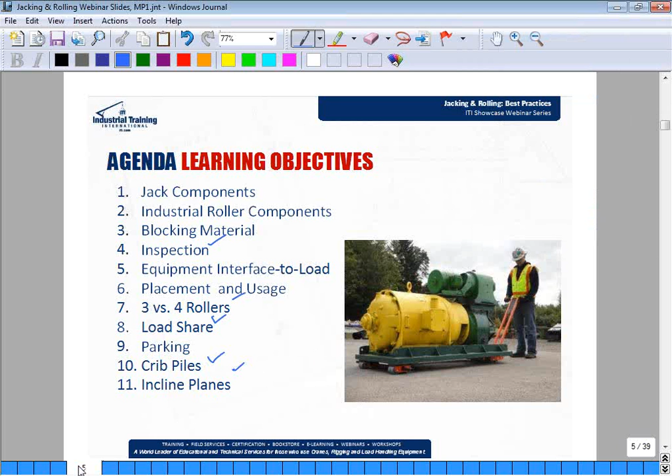What we're not going to talk about today are any airbags that can lift devices. They usually take an external air source and are kind of unwieldy at times, just like this pen is. And so we'll get going on to the next slide and discuss some of the components.

Some of the pieces that I want to highlight here are really the load points. This is where we're going to attach the jack to the load. Here we have a single acting hydraulic jack, a ratchet jack, and a self-contained hydraulic jack. Starting on the left, the single acting hydraulic jack is usually connected to a hydraulic source of some sort, and then jacked either by lever or by machine. The load point here is really the only point to attach the load to. This is typically used in a vertical position, and usually lifts the load vertically.

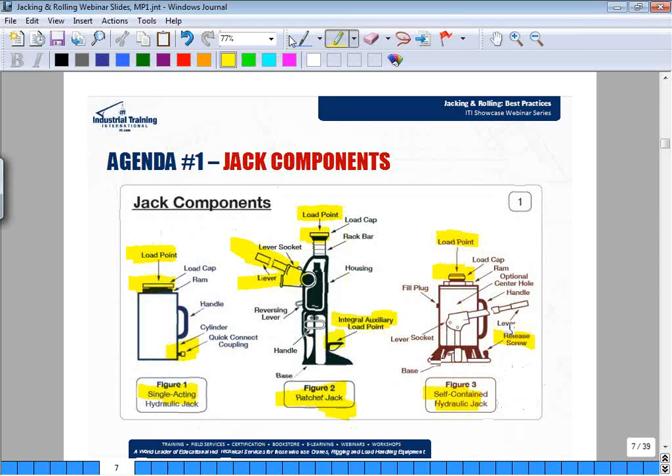Moving into jack components, the connecting piece between the jack itself and the lever arm or the handle is really the most important piece. We show this image here to describe the relationship between the size of jack that we're listing, as well as the length of bar that the manufacturer recommends for use. A lot of times the jacks will come with a specific bar to use.

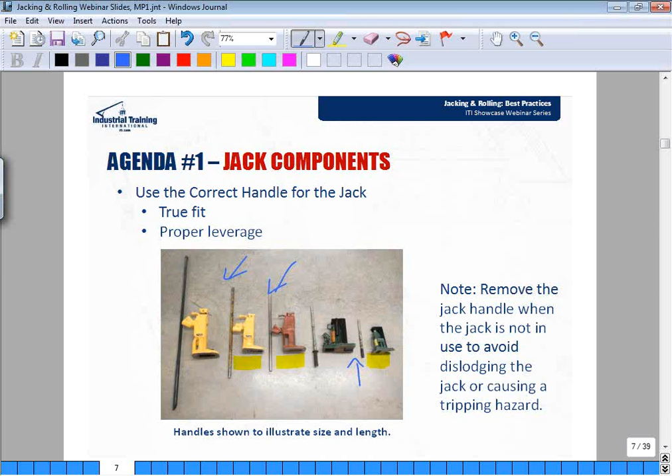Notice here that we have two very similar sized jacks. They're actually both 5-ton capacity, but in one case the manufacturer has decided to use a bar that's slightly shorter than the one next to it. And this is really important when it comes to making the mechanical advantage work for you and selecting the right jack for the right job.

Also, it helps to prevent overload of the bar, so that we have a limit to the bar length that we can use. So one of those was 30-inch and the other one was 36-inch. They're both 5-ton jacks, but based on the mechanical advantage and the ratchet and pull system and track system, different manufacturers have prescribed different handle lengths.

That information can be found most of the time stamped on the jack itself. So for instance, it might be kind of hard to see, but here we have a 30-inch jack handle callout, and that's stamped right on the jack itself. Whereas other companies will write the jack handle length on the manufacturer's label there. So a couple of different examples, and really getting that jack handle length correct is important. It may not even be the handle that the jack originally came with, but if it can withstand the load and it's the right length, then you should be okay.

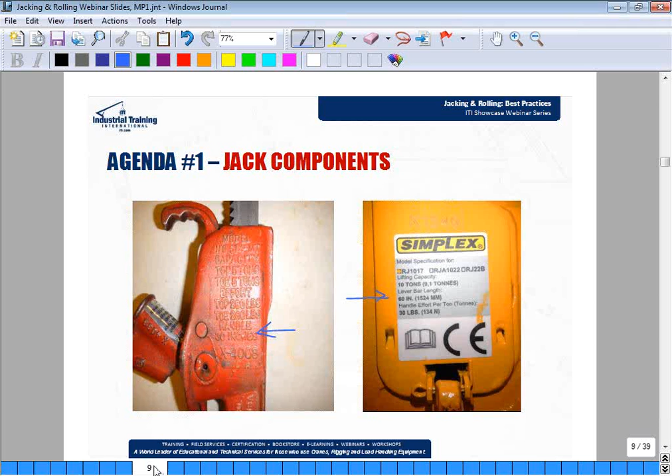So let's talk about moving into the industrial rollers portion. We want to introduce these as two different types, and the first type here is the industrial roller system. It kind of looks like a tank with a turret, and the exploded version here has a swivel top and steel rollers underneath with connecting links. This is all captured inside a housing, and these roll around in many different directions. They can be locked to prevent swiveling underneath the load, and can also freewheel.

The way we size these is they're typically sold in sets of 4, and so the set of 4 here is typically listed, get my pen working, typically listed at an overall capacity for the set. So for instance, 4 at 40 tons, where each is at 10 tons in this example, or a quarter of the entire set capacity.

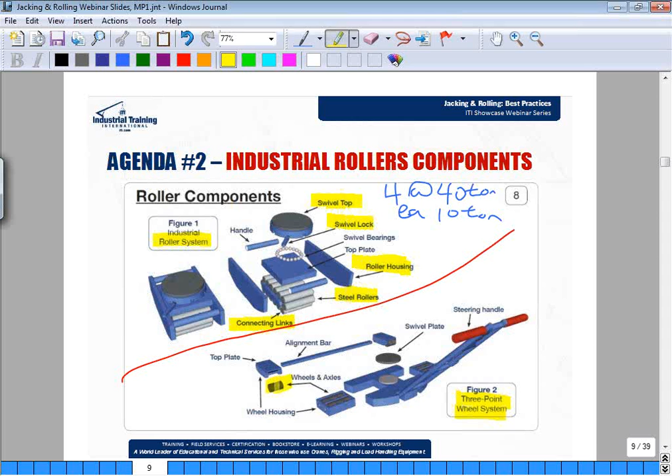The other type of rolling system we have here is a 3-point wheel system, and there's a lot of manufacturers that make these. They typically come in synthetic rollers, or they come in a steel roller design.

We've got two separate little pups here. These are called pups, and they typically hold the load in a triangular fashion, which I'll show a little bit later. The alignment bar that is set up between them slides into a slot underneath the pups themselves, and then there's a steering handle that has its own set of pups and a swivel head.

Typically, the swivel head doesn't lock; it has to rotate freely, and the entire system is rotated and maneuvered by a person. These are typically sold in sets of 3, and the interesting case here is that the steering handle set, say if we had a 25-ton set, the steering handle would accommodate 50% of that capacity, or in this case, 12.5 tons. The other two, the two pups, take up 25% of the overall capacity, or 6.25 tons each in this example.

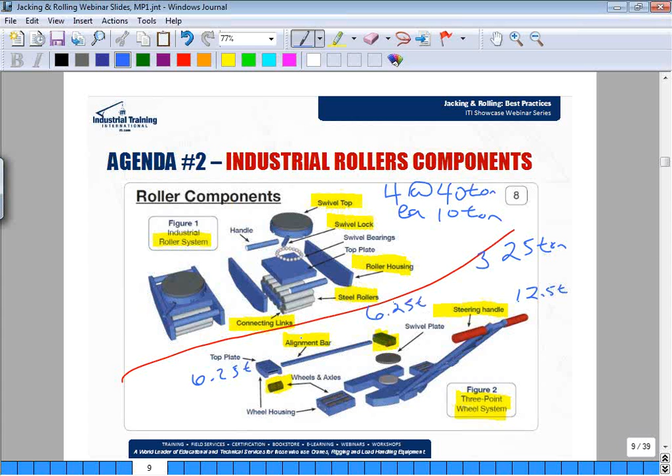Down below there, the steel rollers; they also certainly make synthetic rollers, UHMW or high density synthetic material, to help for non-marring. Sometimes the wheels are larger depending on the frame of the roller system. So check with the manufacturer. Hilman's are manufactured in the northeast of the U.S., and Heavy Haul is another manufacturer. There's a number of really good providers. These folks have been around for decades and have really gone to school on a host of different roller types, so it's worth taking a look at their websites to investigate what type rollers they have.

Sometimes we'll be able to put rollers upside down and roll a beam on top of them for bridge installation and other applications. So depending on what the needs are, some have a hinge top, swivel top, and I think even on the next slide, let's go there just for a minute, there's a style that is a tilt type, so that can be used to go up and down inclines. In this particular case, this is a Heavy Haul design, and that entry and exit incline on the side plates there permit for up to 26% grade.

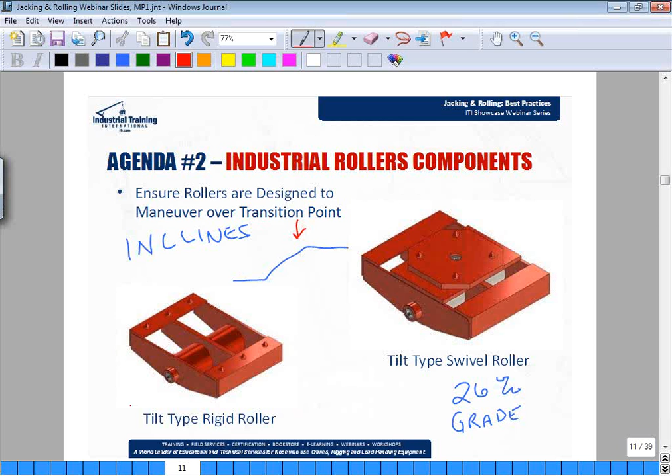So the incline can be pretty aggressive, and there's just a single set of wheels in there, and they stay parallel to the load, but as the incline changes underneath, the single axle accommodates that transition point on the break in to go up the incline and the break over at the top of the incline. So it's really choosing the right roller for the right job. One note back here at the turret style, the recommendation from the manufacturer is that these can be used on inclines as well, just so long as they're attached to the load itself, however you can accomplish that.

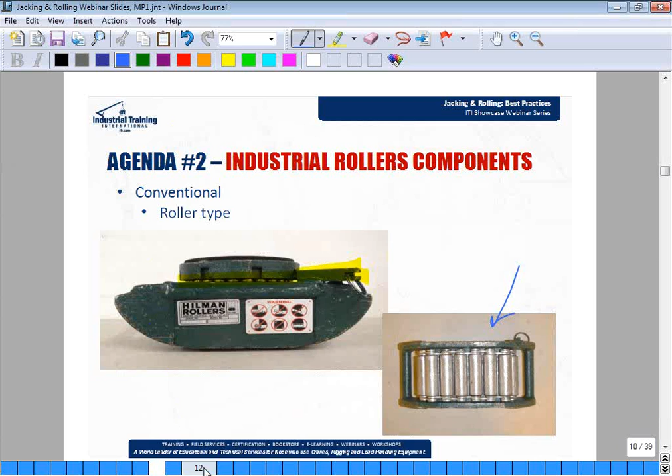Moving into the other type of roller system, this is just an example. We have two of these systems here at our facility, a 3-point rolling system. Not pictured here is the actual crossbar that would accommodate the joining of the pups, both for this large 25-ton set as well as this 10-ton set here. You have a bar that goes between them and keeps them aligned and able to traverse corners, as well as if any unloading occurs, they can stay at least parallel until you get loading back to the pup.

One note about these 3-point rolling systems is they are for flat surfaces only, not recommended for inclined surfaces, just due to that transition point tends to mar up the rollers themselves, and they're not really rated for that loading type on the bolts themselves and the axles that hold the rollers in there.

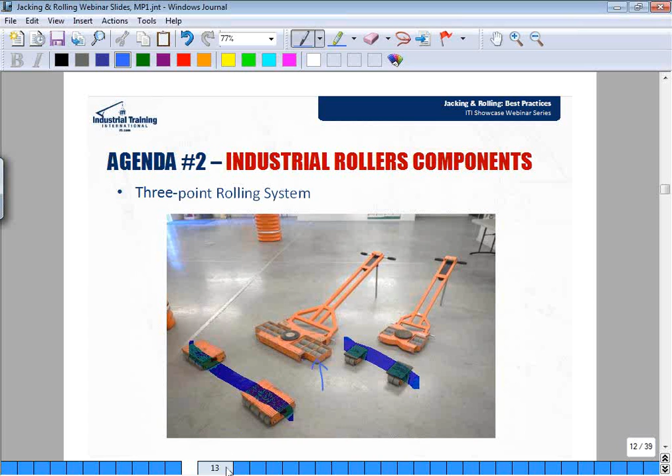So just a few notes on industrial rollers and how to use them. Typically, when we haul loads, we want our palms to be face down when we're steering the load, and we typically don't want to use the steering handle or the steering person to push or pull the load. We want to allow other people or equipment to propel the load itself. And Mike, do you have anything?

Yeah, the safety aspect for almost any handles used for rollers, the concept here is palm down. And the reason is, if you're rolling along, and for whatever reason we haven't cleaned off our rolling surface very well, and we hit some grit or gravel, and it actually freezes or stops, let's say in this case the steering unit, the momentum of the load can go forward and slide over the top of that roller, and then slam the handle down, and if our hands are palm up, it can take our hands down to the ground with the handle.

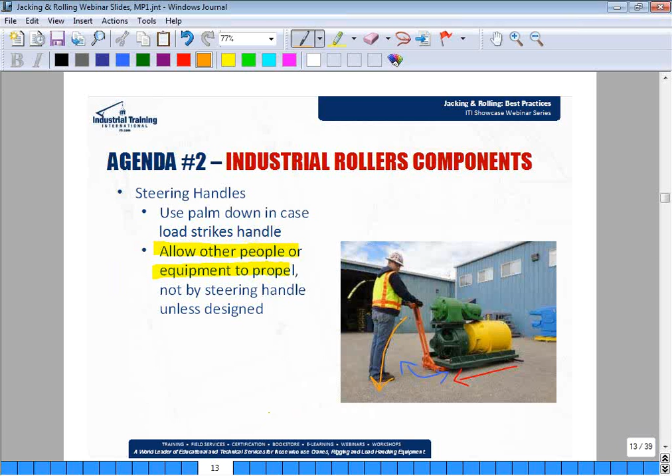So you want to make sure that we keep some body space back as we're walking. Just anticipate some issues that can occur, but in all cases, first thing is to clean the runway off, and that will help minimize the risk and lower the risk to that. Those are great safety notes.

One of the last roller component types is sort of an old school system and model. We have the pipe or the round stock, any type of round timbers or steel pipes that we use to roll along a load that has a base skid system. Notice this one has two main beams, and then it actually is ski-tipped a little bit on the ends. We have loads like this, and we use pipes at all three of our training centers in Woodland, Washington, Memphis, Tennessee, and also in Edmonton, Alberta.

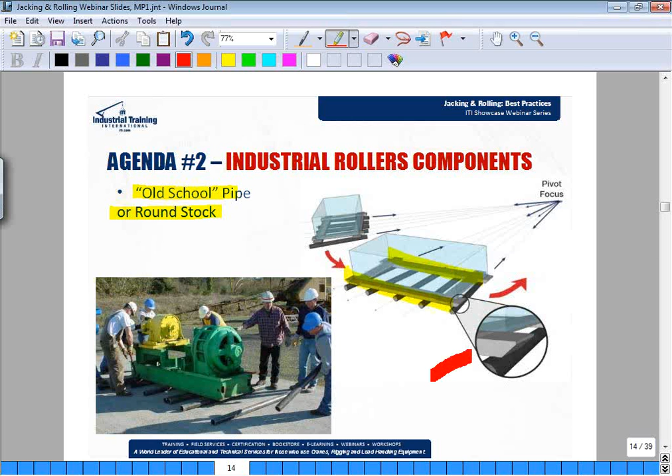And the pipes are laid down. These are 4-inch Schedule 60 pipes, and they're laid according to the travel path, so they need to be parallel when we're running straight away. And then when we need to turn, we're going to put a cone or create a visual focus point out there, and we'll turn those pipes prior to placing them underneath the load, like the spokes on a bicycle wheel. And then we push or pull that load across, and as that hits that angled pipe, the load will turn, and we can make a 90-degree, or even a large sweeping 180.

It can be done with round stock pipes, or even round wood posts, as Jonathan said, that are high capacity, or we use ash, and they're more than fence posts. They need to be a super hardwood if they're wood, such that they'll stand up to the work activity. Having some pipes around, it's an old method of moving loads, but it's still very suitable and very handy. If you don't have a set of rollers on a job site and you need to move something quickly, take a look and identify the size, diameter and wall thickness of pipe that would be most suitable for the load weight.

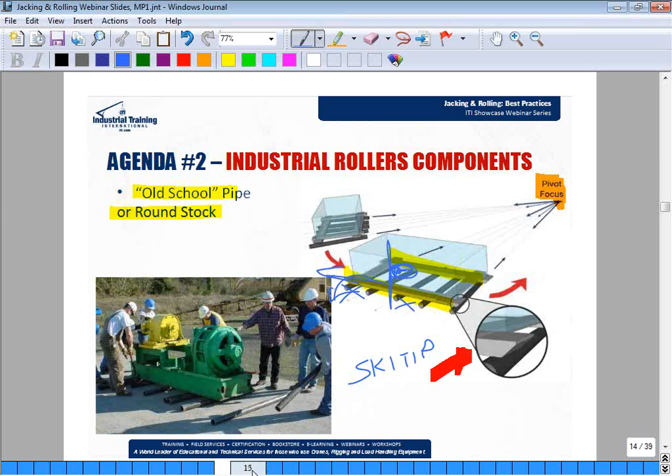When we talk about jacking, one thing that comes to mind specifically is blocking material, either using jacks on blocks or using jacks to lift a load and then to block underneath the load as you lift it. We have some different information here for the different types of blocking material you may find: Doug fir, white oak, and ekki. Ekki is a very dense wood.

To just highlight some of these parameters here, the Janka hardness test. Of all things, they actually fire a ball bearing at these different pieces of wood, and they figure out how much force it'll take to push behind that ball bearing to get it embedded half the diameter of that ball bearing. And you can see the Janka hardness for the ekki wood is much higher.

I mean, twice as much as white oak and Doug fir. So it just kind of gives you a perspective of how hard and how dense this wood actually is. Elastic modulus is the overall strength of the wood, and modulus of rupture is how the wood is loaded parallel to the grain pattern. And so if you have a choice to use, I mean, ekki is a little more spendy, but it'll last you quite a while.

And Doug fir and white oak are typically used. We've got those in our yard. And if you have any questions or want to find a little bit more information, the source down here, wood-database.com, is a useful place to go to find this information.

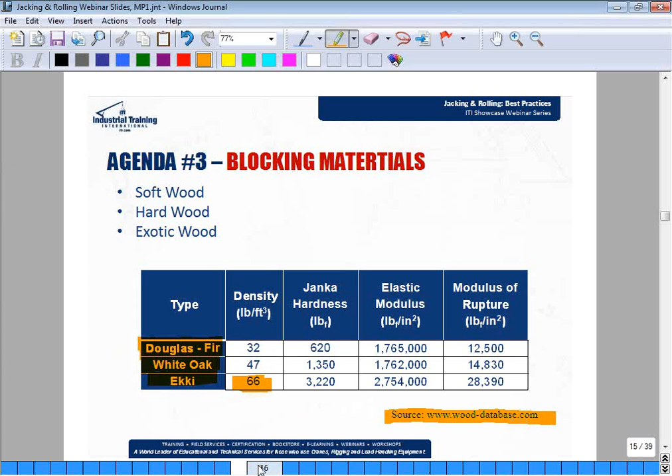Moving on next to how to inspect our gear. Just a minor note here, we're just going to talk briefly about this, is using ASME B30.1 as our go-to document for the inspection criteria and rejection criteria for these jacks and rollers. I had the privilege of serving as the chair for this committee for a number of years, and we expanded it from jacks to, it has now mechanical jacks, hydraulic jacks, airlifting bags, air casters. It has gantry systems, and it's introducing now also strand jacks as the next target subject to go in here.

And in each of those chapters, particularly to the equipment, there are discussions about testing, if necessary, design factor as applicable, then operating environmental conditions and issues, inspection, removal criteria, and operating practices. So each chapter's got a great listing provided by a consensus group within the industry.

And if you don't have this and you are using jacks and rollers to help move loads, great thing to get. I know you can get it at asme.org or the ITI bookstore, but in either case, it's good to pick up the standard, along with the manufacturer-specific recommendations or requirements or guidelines, to help manage the equipment that you have in your inventory and or the equipment that you rent.

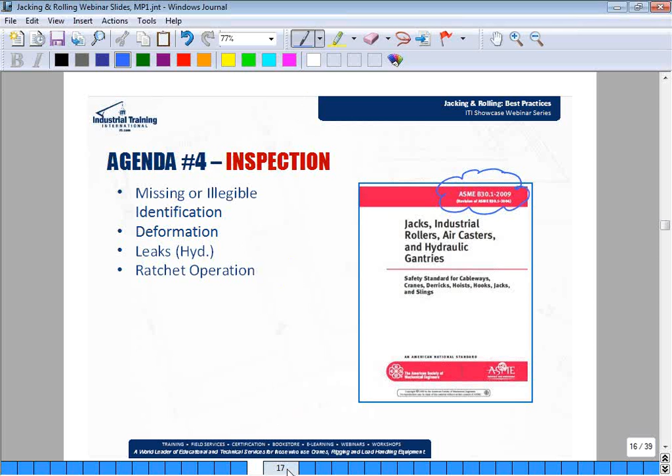Moving into our next agenda item, one thing that's actually listed in the B30.1 is this comment about using a friction surface or a friction material to place between the equipment and the load itself. And what this does is it's really helpful to use this wood or compressive material to place between the jack and the load. Specifically, these load points here where they're going to come in contact with the load itself.

What this does is the wood or compressive material actually fills the gaps and sort of equalizes the load on the load point to allow that load point to first of all stay engaged to the load, and second of all to use the entire load point for lifting.

For some of you that have been on previous webinars with us, you know that we've had a number of programs talking about coefficient of friction. The average for steel to steel is about 10%, and the average for steel to wood is about 30%. So by slipping a little piece of plywood or high-strength material in here, we create a better friction face-to-face contact point, and it helps ensure a better engagement or long-term engagement while we have the equipment in use.

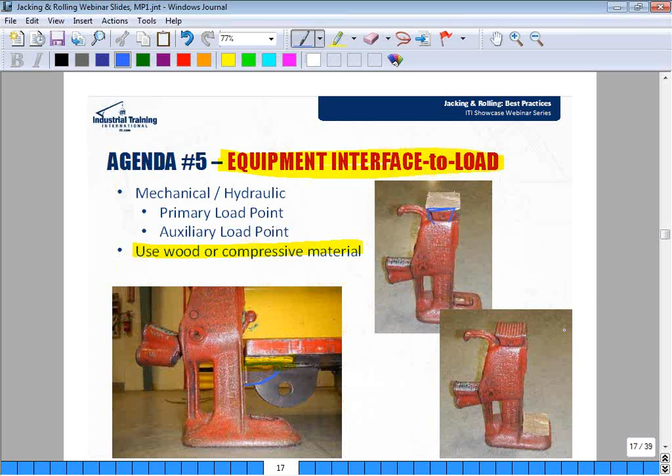And the challenge here is constantly when we're going to jack, the first thing that's going to happen is that the load to jack interface contact point will not be perfectly level. And we're generally going to be potentially putting some toe load to it or some slight side load to it, because we have to move the load, and these jacks are built to do that with the foot base length and width to permit that, and within allowables, which we'll get into in just a second. But we sure want to make sure to stick that jack and make sure the contact surface doesn't move while we're within that operating range or working range.

Moving next into placement and use of jacks. We talked before about the solid and level surface the jack needs to be on. It can be used sideways, but this indeed is one of the most important pieces: having a level surface to use the jacks.

The next piece here is stay within the rated capacity, and we'll calculate this in just a moment. But whatever we decide is our loading on the jack itself, we need to make sure that the rated capacity is greater than that load. We'll also have to be aware of cross-corner loading. We'll explain what that means a little bit later.

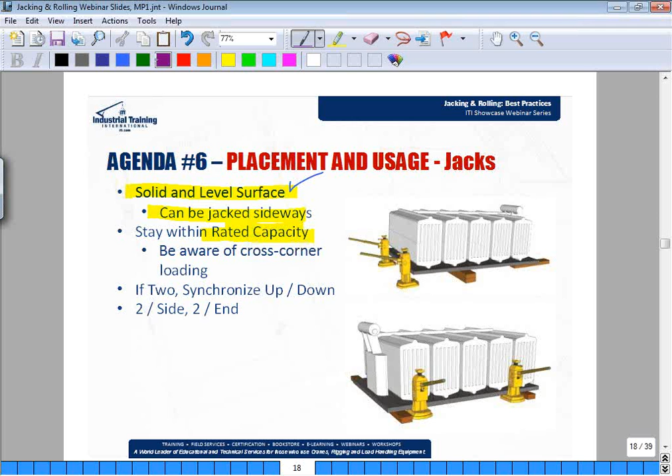Jacks typically come in sets of 2 when you're in use, either using them 2 on a side or 2 on an end. One thing very important to us is to ensure that we use 2 on the side, 2 on the end, and I want to make sure that we're all on the same page here. If you take a typical base load, we'll say 4 jacks, that's a terrible idea.

And the reason is we may end up with 50% load cross corner to these 2, 0% load to these 2, and we get the load unstable. What we'll term it is that the load can helicopter down, meaning that they can all fall sideways with the instability of the load. All 4 jacks can literally fall in a counterclockwise or clockwise position and take the load back to the ground in a heartbeat.

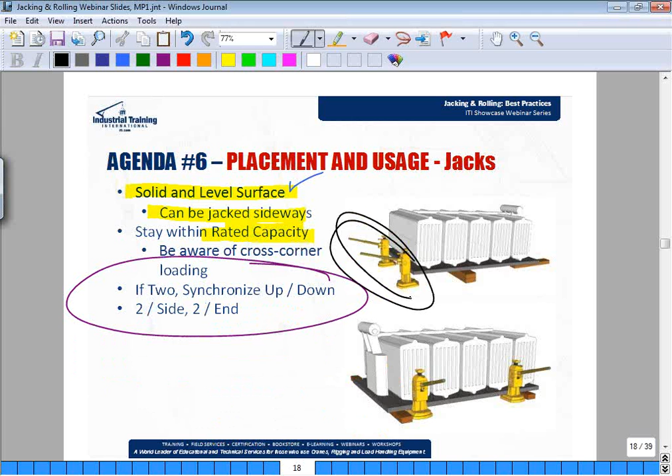So really the idea is to just use those 2 on the end or 2 on the side at a time and commit ourselves to only work slowly, efficiently, effectively, 2 on the end, 2 on the side, and we'll work the load up by installing blocking and cribbing as we go.

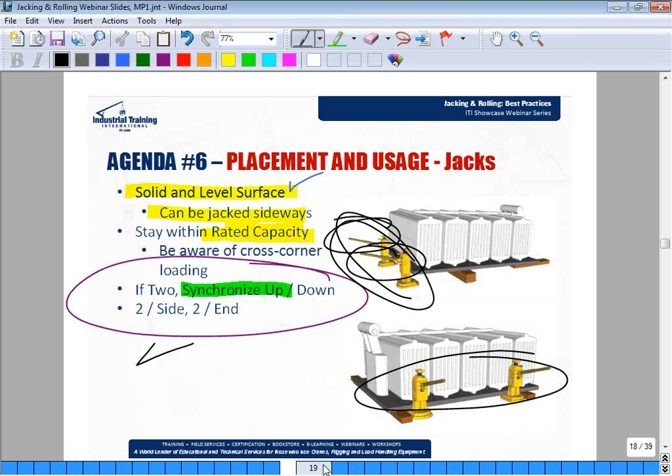Now, the synchronization is really important. One guy can get too far and too fast, especially when you use mechanical jacks, but certainly hydraulic. If you think about the process, you have to call out a cadence, up 1, up 2, up 3, up 4, and each person handling that jack is in cadence with the brother next to him. So we're trying to equalize load as best we can. Those are great practices to use when we're using jacks on both sides of the load or one side of the load.

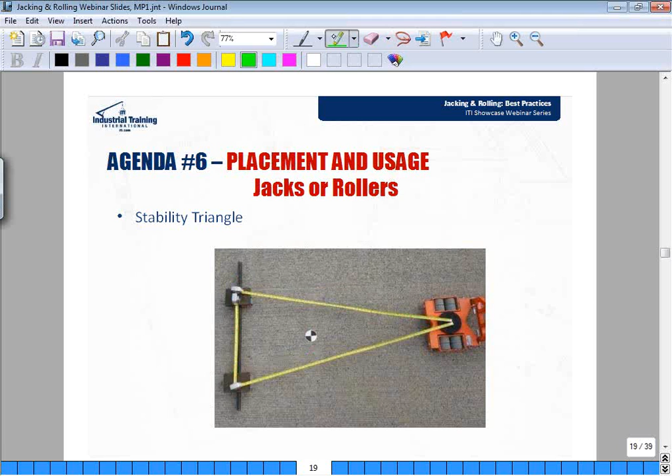Talking about stability, we talked about using jacks to provide stability. We want to talk about rollers too, and specifically the stability triangle, which is what we're trying to achieve with our 3-point system here. This depiction shows the load as it sits over the roller system, with our center of gravity in the center, and we want to capture that center of gravity with as much distance as possible between it and the sides of our stability triangle. That'll provide us the most stable platform to move the load.

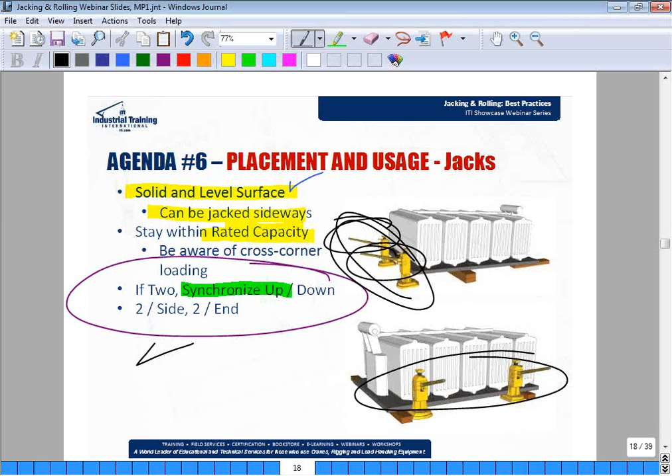Jonathan, we just got a question, and I think we'll break in here to the program with that question. We'll go back to this one particular frame, but the question's really well placed: can you use jacks of different capacity? I would suggest these really should each be 10-ton jacks, let's say, if that's the size needed for that particular load, and of the same manufacturer.

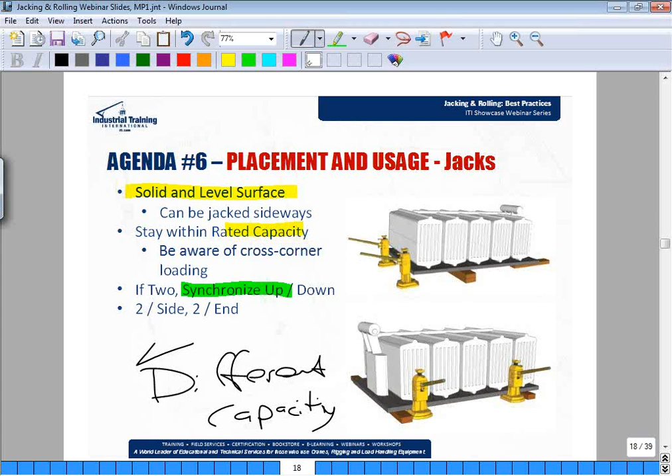You can really get in a bind using, let's say, a 10-ton and a 20-ton. They're going to have a different rack, the gear teeth, the span; the stroke height per stroke is going to be different between the two. Really very dangerous or ineffective. So the answer to the question, no, you want them paired. You want them same capacity, same manufacturer because of rack and travel, stroke length, stroke height.

I'm going to take out this little jack right here, go to the end, and install one jack. We might use a 20-ton jack right here as a single. You'd be better off using a single jack at the midsection of that end if you didn't have two matched pairs with enough capacity to handle that end of the load.

So using jacks of different manufacturers and different capacities is a fast way to get in trouble. Using hydraulic jacks, we're going to end up with pressure issues and height issues. You can feel it in your hand as you're jacking on hydraulic jacks, but if you have different hydraulic jacks, it's not a good idea if they're hand-driven, so they need to be matched.

And also, you have height changes in the jack itself by either the main load point or the auxiliary load point. The available stroke height for a hydraulic jack from 10 ton to 20 ton will be different. So, you know, there are issues related to that.

If they are plumbed together on a common console, and we have two of those, so let's put in another one. Sorry about that. So we put in two of those side by side, and they're plumbed together into a common console. Then we can run them off the common console hydraulically and introduce the same amount of pressure to both.

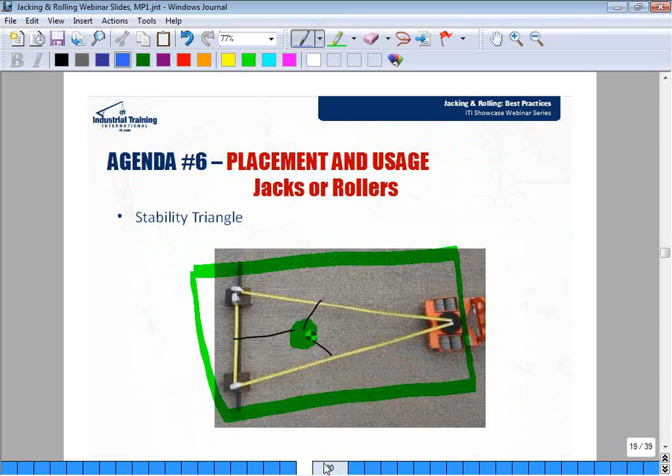That's an excellent question. I think we answered most of this, Jonathan. Is that right? Yeah, that's right. Let's move on to the next piece of information here, and keep bringing your questions. We don't mind stopping for a quick question if it's really pertinent and we want to answer everything we can for you.

And talking about placement and uses of jacks, we want to talk about the load, and really another point from B30.1 is that the load grade itself should not exceed 4%, and we have a couple ways of determining that, and really it's determined by the distance from one end of the load through to the other, in multiples of 100 or 50. Those are the easiest to do.

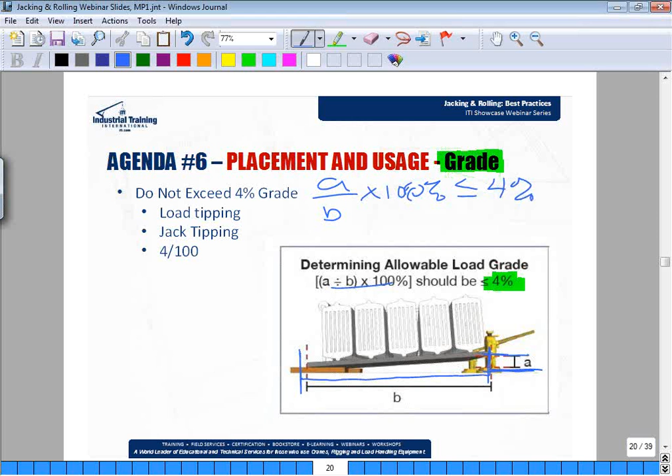But say we had a height difference here of A, and really the equation that we want to solve for here is A over B, just like it says right down below, times 100%. It should not be more than 4%. And just as an example, one good rule of thumb is if we can measure out 100 inches from one point of our load to another, and we can measure out 4 inches in vertical height change, we've reached our 4% grade here.

And that's a good time to stop and place blocking material underneath that load, and move to the other side to level it out and get it up where you want it. Put it on rollers or some other system underneath it.

So why don't you, on your drawing there, help demonstrate that you can go 4% below in a different color there. And so we actually have a full stroke. We can go 8% change as we're jacking. So we might be 4% down. And let's see, we'll put it down here so that the load can be on this incline and go up to 0 and go up to 4% grade above. So you actually have quite a jacking range when you consider we're trying to walk a load on the end all the way.

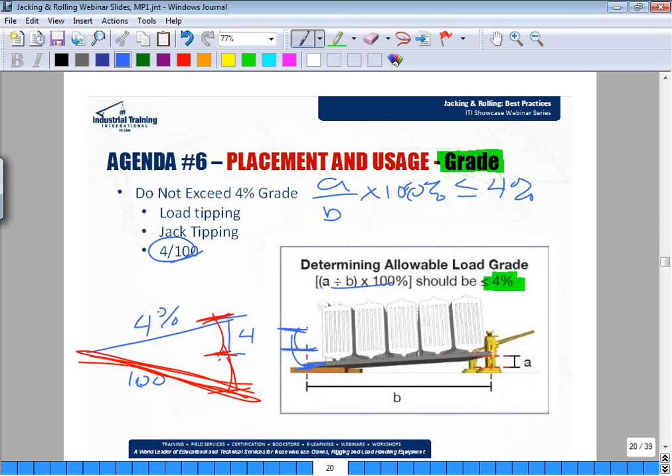So on the picture that's there, we're already down. We'll block this in, and we'll come across with our jacks. And so we're already at the -4. We'll go up to 0 and go up another 4, and then we'll have this new incline here, right? So it sounds fairly restrictive, but when you actually start moving a load and getting it built up on blocking, you have an entire range of the -4, 0, and +4, and actually that's quite a bit.

And you chase it up with blocking in case for some reason you have a jack failure or something else that goes crazy on you. Chase the jacks with blocking, so as it may be raising 1 inch, 2, 3, 4 inches, you're continuing to shim or put temporary blocking material in there. Pull out the 3.5 inch, put in 5 inch or 5.5 inch as it continues to walk up.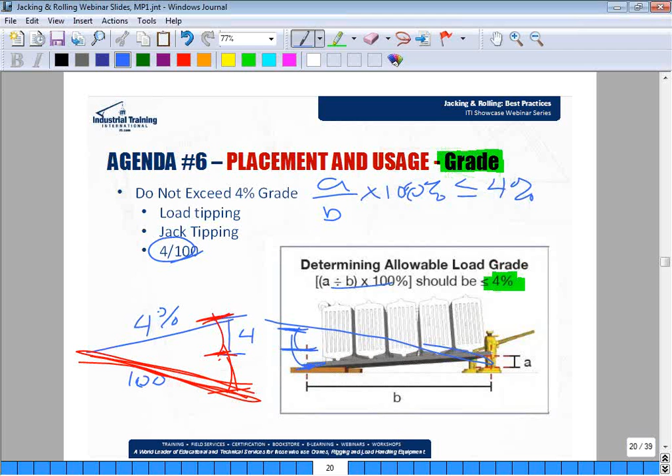Great points there. Moving over to the rollers and talking about the placement and usage of rollers, and really the use in this case is how to get it from point A to point B, and what are some of the considerations we want to make in doing that.

So we put this drawing together just quickly that this load has to travel and get to this landing point right here, and we want to make sure and prepare a travel path properly, and that means cleaning the floor off and taking all the debris out of the way, and also the methodology.

So as we want to take this approach here, I'm going to highlight this. I'd probably start this load up a little bit. If I can renegotiate this load and take it up just a little bit on, we'll call it the north side, and reposition that, jockey back and forth before I make my entrance.

So notice that I'm hugging that north demarcation line or wall there, and then I'm going to have it flow through and make that hard turn and sweep all the way going east. And I may stop here because I've got to get to my landing point right over here, and I can hardly make that turn. So what I'll do is I'll back that load up to here

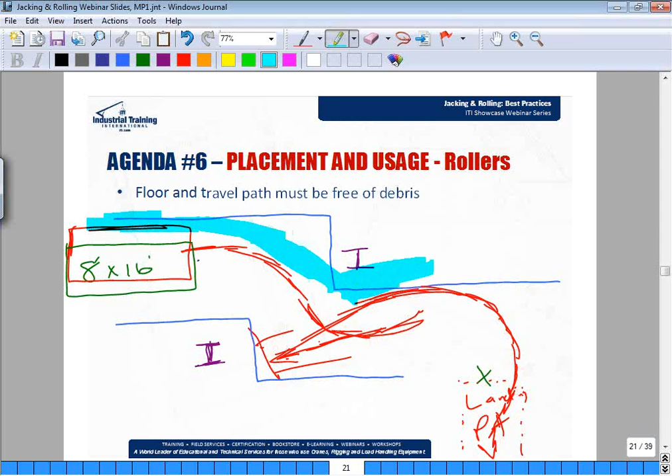I need to clean that runway or the travel area off, and those aren't always hard areas. They may be floor marks or floor travel paths, but anywhere that those rollers are going to be traveling, all that area in between may exceed a pre-planned roller path, but that area needs to be cleaned because we don't want to have to stop and then re-clean something while we're in motion. So prepare the job, prepare the task.

One, identify how we want to move the load, and number two, based on that, what's my shadow that I could possibly run my rollers into, so that I get a debris-free floor and don't have any interruptions, or that it doesn't grab my rollers and stop it, turn it, twist it, or cause uncontrolled movement. So just as a point of information, pre-cleaning the floor is really the secret for a good, efficient rolling project.

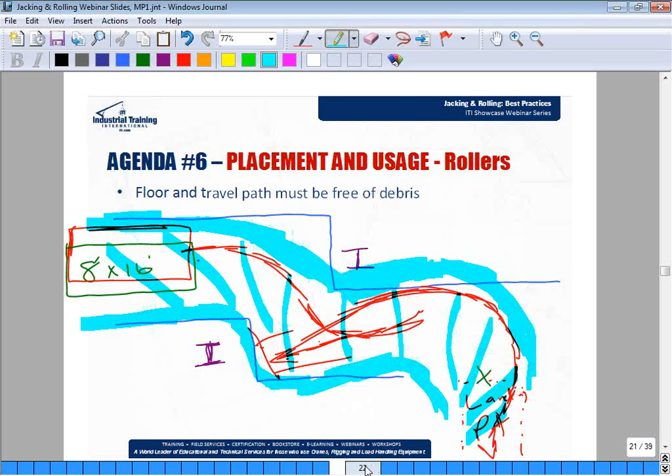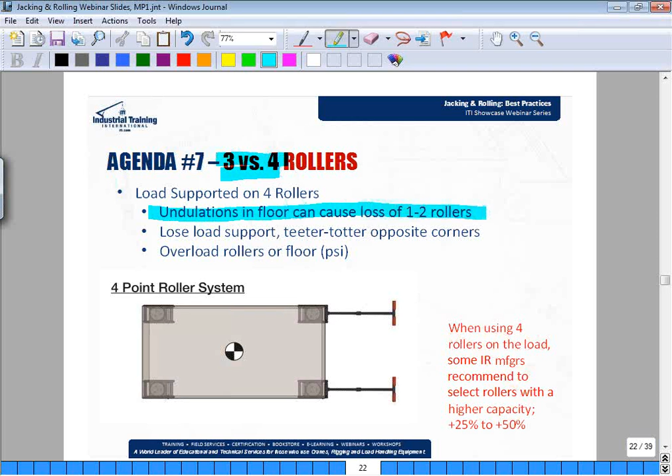Talking again about rollers, and really we want to highlight this difference between using 3 and 4 rollers. 4 rollers are absolutely acceptable. They come in sets of 4 anyways. But one caution we want to point out is that undulations in the floor can cause loss of 1 or 2 rollers. And let me highlight what this means down here.

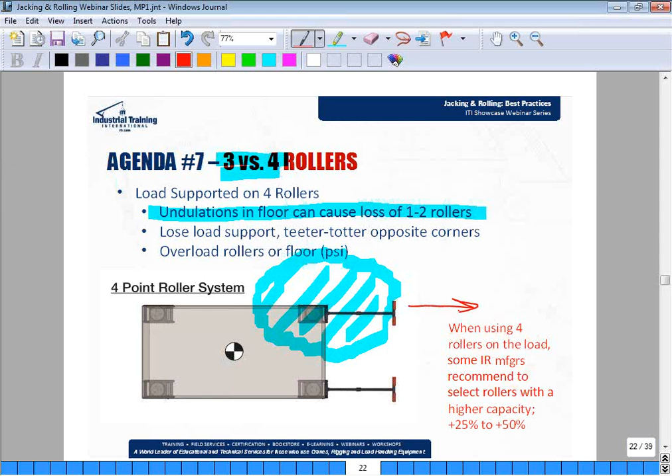We can have maybe a low portion, maybe a depression of some sort in our flooring, and if that's the case in this roller setup here, we could actually end up leaving the load altogether with this roller, and in turn the load may drop to this side, or it may teeter-totter on both of these rollers here. And we may have even a disengagement of this back roller here to slow down and even stop while the load is still rolling.

And so in a lot of cases, a manufacturer of industrial rollers will recommend selecting rollers of a higher capacity, up to 25 or even 50% over what you think the roller is actually going to use. And it's just for this very reason, this cross corner loading that could occur because of these different floor levelness tolerances that we see.

And I noticed that some manufacturers are coming up with a compression pad to try to maintain at least contact with the roller to the load, and it may be a compressible, like a thick rubber pad that's very high density, that springs up and down slightly as we get undulations in the floor.

This is a very common problem, and as a rule, typically, even with a four roller set, we'll only use 3 rollers within capacity and reposition them, as you'll see in the next couple of drawings and downstream in the presentation. But 4 rollers really are a nightmare sometimes. So you really have to weigh and decide what's my best opportunity here for maintaining control.

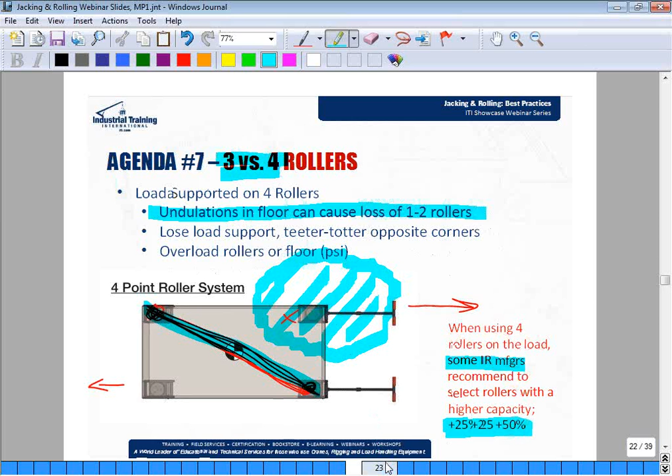So that's how this is set up. And each of these, the 4 corner rollers, we've got stability for the load. That's always a big issue, is how far are we from the center of gravity to the wall, you might say, created by the rollers.

And so let's say we're going to make a left-hand turn here. What you probably want to designate, you're going to have 2 people out here, 1 on each handle, and we'll just call this handle A or roller A and roller B. And you want to designate one of them as sort of the primary steering roller, and that person then will kind of predetermine he's going to make that turn with that roller. Now the arc's certainly going to be a little different, and so trying to maintain parallel the best you can.

And if A is the primary, meaning that my job on B is to track with that roller to the best of my ability with the least amount of resistance. And notice that arc is larger, so some negotiation with that roller with the handle is really important. But you can only have 1 lead dog, and basically you assign that maybe to the inside roller, to that person, and as he turns that roller, he makes slow, steady turns and holds that in position. My job on B is to track with him and make that arc work.

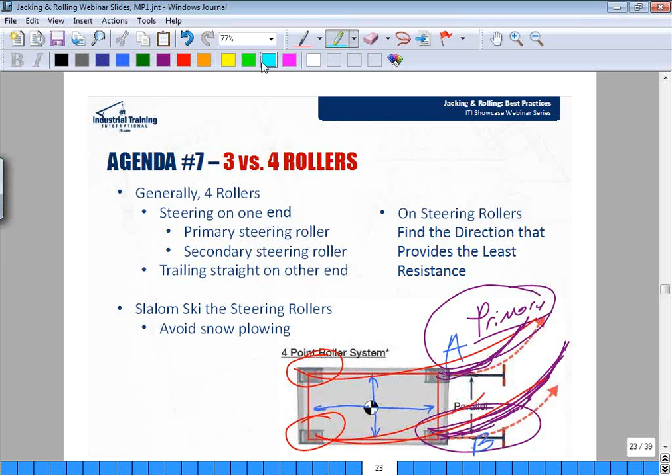One thing to keep in mind with using rollers like this is the method I described is like slalom skiing for snow skiing, using 2 skis and keeping the skis parallel at all times as you're trying to maneuver down through the snow, and avoid snow plowing. So that is where the skates or rollers are toed in and they're fighting each other, or toed out, they're fighting each other. They're causing complete resistance to forward movement. So avoid snow plowing, which really the instruction is to keep them parallel as best you can as you're moving through a load travel path.

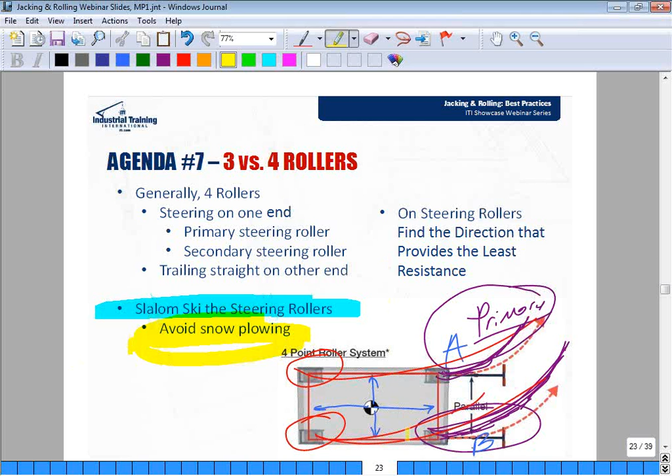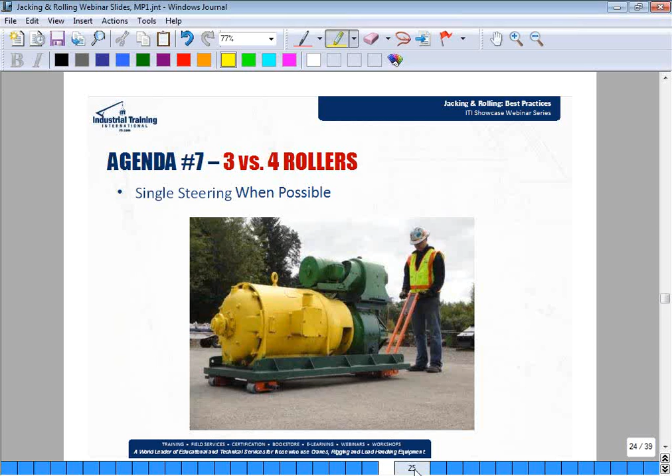So moving on from those 4-point systems, I want to talk about 3-point systems. Even with a 4-roller set, you can use one as a 3-point system, and we typically recommend single steering when possible. Sometimes it's just not possible. I know we had a large structure we had to move here, and we used 4 and even had 5 guys underneath moving and maneuvering a load. So with this 3-roller concept, like we said before, it's common to impose 50% of the load on the steering roller.

And in general, the concept here is like a 3-legged milking stool, and there's really no opportunity for the load to come off of the rollers themselves and sort of disengage from those rollers. It maintains constant load. So with an undulation in the floor, 1/16 inch, a little belly or a little hump, it will maintain constant loading all the time, though it's not perfectly flat. A 3-point system will always be your best friend to manipulate or work these rollers and loads through a load path.

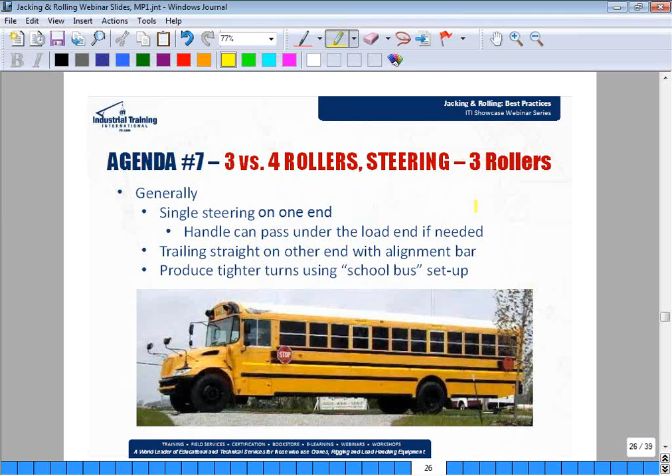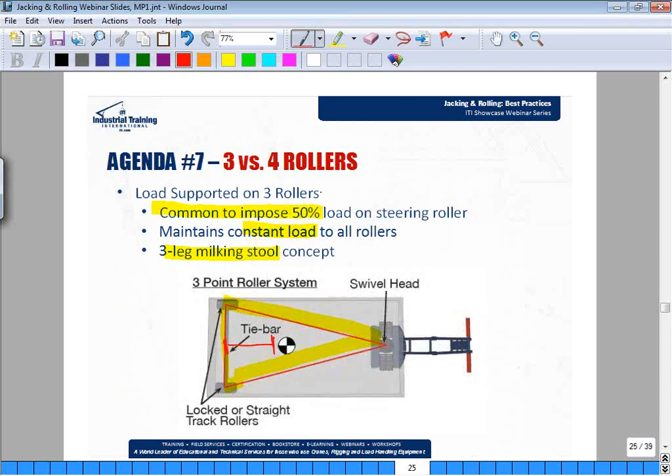Moving now, generally, if we're talking about steering on one end, it's possible to pass the handle underneath the load, and the other end is going to trail straight regardless of what the front does. One way to produce a little bit tighter turns is using the school bus setup. If you notice back here in this image, we have some distance between the center of gravity and the back axle location. And using a school bus method, we can actually move the point of application for our rollers a little bit closer to the center of gravity.

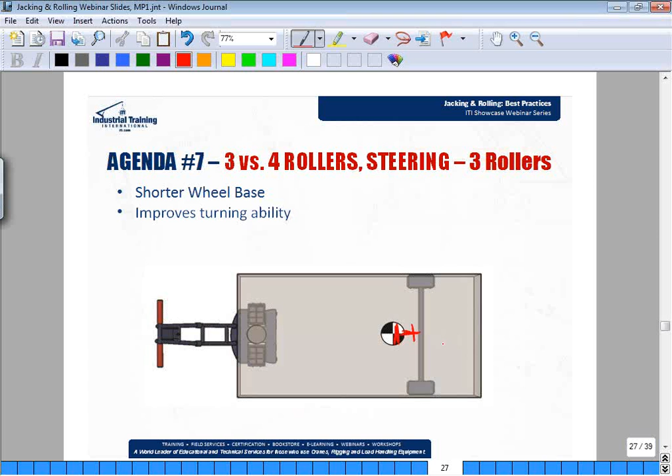We still have a really good stability triangle here with our rollers, but this allows us to not use the entire load's length, but instead, if we have a really tight corner that we want to try and get around here, we can actually use this roller as our pivot location and then start to turn the load that way.

So a shorter wheelbase accommodates tighter turns, and so we move that back axle up and the two pups get closer, but we still have to certainly maintain stability. This will certainly cause you to stop and recalculate the load imposed on those two rear rollers, because now, in this case, they're probably looking at load there versus load here.

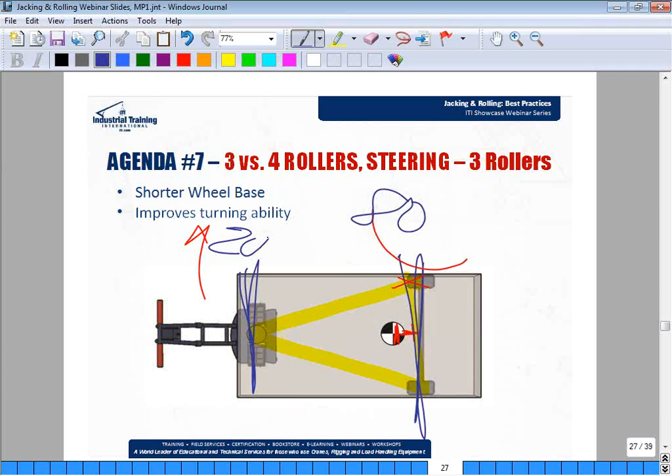We may have 80% of the load on the two pups on the back end, 20% on the steering. So the closer they get, the more they accept of the load's total weight. And so you just have to make sure, are we still in rated capacity? That is always a question.

Three things in rigging. One is, what's the load weight? Where's the center of gravity? And what's my rigging method? That could be above or below the load based on lifting with slings or jacking and rolling it. But always attending to, where's my pick points, my bearing points, my support points in relationship to the CG. And then double check the rated capacity and make sure we've got enough horsepower in the support equipment to handle that weight.

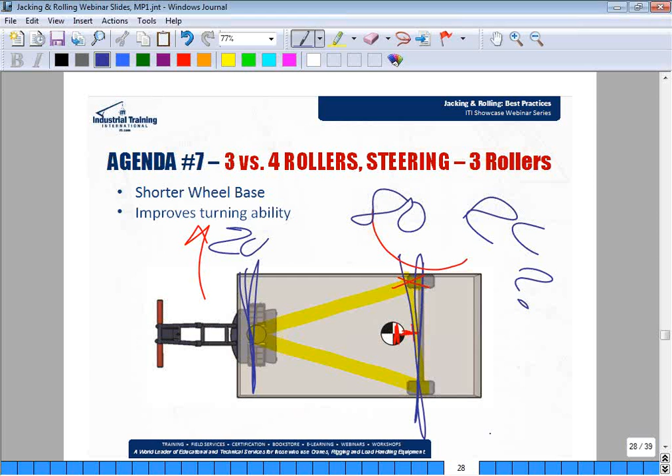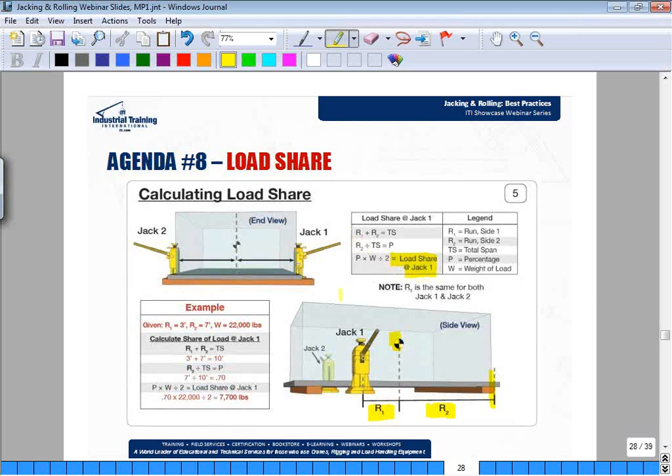Talking about rated capacity, we've provided here a way to calculate load share for a 2-jack system when trying to lift a load using jacks. Just to orient you, we've got run 1 here and run 2. Those are in relation to the jack to the center of gravity, and then the end of the load, or the tipping axis, to the center of gravity on the opposite side. Ultimately, we want to know just the load share of one of our jacks, and we can use this set of equations here to help us figure that out.

I want to take you real quick through an example, and we'll take a look at some distances here. So down below, we've got say 3 feet and 7 feet. That is 3 feet from jack 1 to the center of gravity, and 7 feet from the center of gravity to our tipping axis right there. The weight of the load itself is going to be 22,000 pounds. And so going through our set of equations, we've got run 1 plus run 2 equals the total span. So that's the span between jack 1 and our tipping axis. 3 feet plus 7 feet gives us a total span of 10 feet.

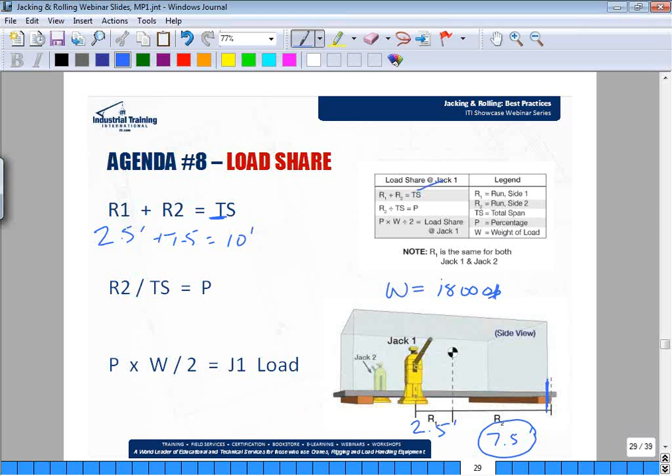Now, the interesting thing about this is that we have an inverse relationship when it comes to loading. That's one of the central ideas of load share. Really, the distance between the center of gravity and the tipping point is going to be the ratio, or the proportion of load weight on the jack itself. And so if we take 7.5 divided by 10, we get 0.75, and that can really be said as 75%, or 3/4 of the entire load is on both of these jacks right here.

If we want to find loading to just this one jack, we can figure that out by taking 0.75 times 18,000 divided by 2, and this 2 represents that we have 2 jacks in the entire system. And this comes out to be 6,750 pounds to that jack right there. So if we have a 5-ton jack, we've got enough to lift at least this share of load here, another 5-ton jack on the other side, and we're good for that side.

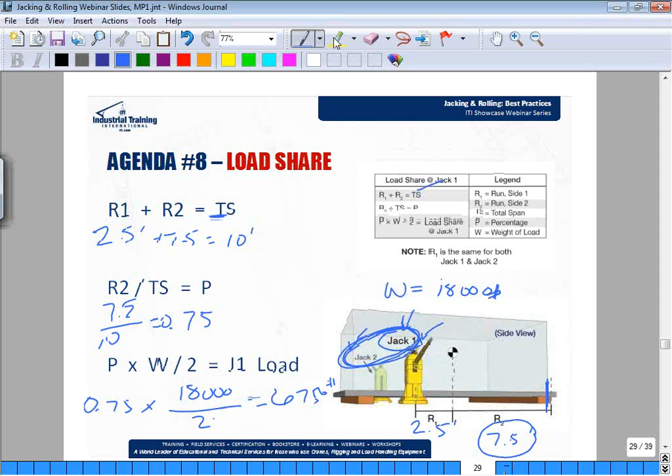Next part here is looking at positioning of jacks or rollers in relation to the center of gravity and why it's important. This came from a workshop that we used in our Master Rigger course, and the idea here is load share and stability. These are 2 questions, and we're looking down on the top of a load, and there's 3 different systems that we potentially could use. This has got a big flat bottom on it, fairly structurally sound, and so the question is, could I use roller set C, and I'll just highlight these in yellow. Could I use that roller set around the load?

And then let me highlight A. There's A and A and A in the corner, and then highlight set B. Sorry, got that one out of alignment there. I'll get that in. And that's blue, and this is blue, and that one's green. So let's take a look then. If I opt for C, I'm just going to draw a line from roller C to roller C and roller C here if this was a proposed setup.

And notice how close that center of gravity is to each wall created by that, plus we have substantial loading here. I'll just put this in blue. We may have 80 to 85% of the total load on one roller as close as it is to the center of gravity. This may be in the 3 to 5% range out here, and down here is going to be the balance, 10 to 15% or so on this roller. So we have a really disproportionate loaded system here, and stability is really a substantial issue for us.

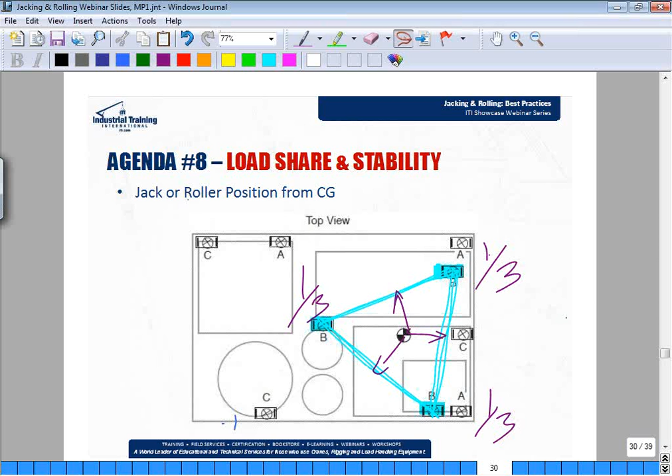So it may look a little crazy, but the idea is think about weight, think about center of gravity, think about stability, because the rollers are below the CG, and if we get that wall too close to the center of gravity, we have a tipping issue. And a number of loads have actually tipped over because of momentum turning, and all of a sudden the load goes sideways. Think about it like this: when you set up rollers, it's as if you just drop a rock in a pond, and that little rock is the center of gravity. We're going to drop that right in the pond and create rings.

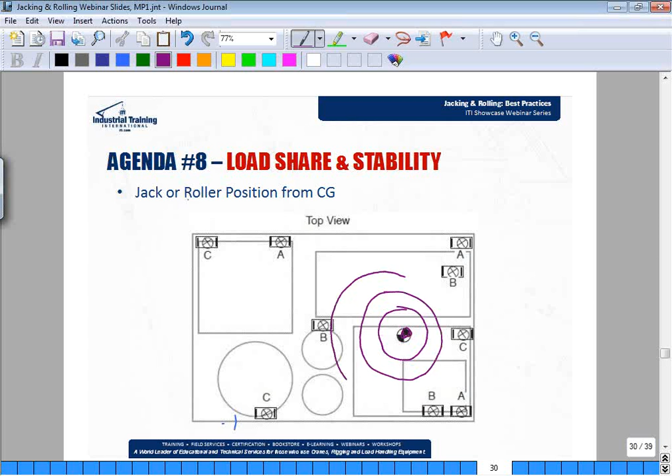And the little pool rings that come out once you drop that in, where on that ring series can I put my rollers? So we'll highlight this. That B falls right in that ring series, so we're maintaining our best optimum for share of load and for stability. So since we would choose maybe 3 points to roll this load on, just think about working out from the center of gravity outward in uniform distances,

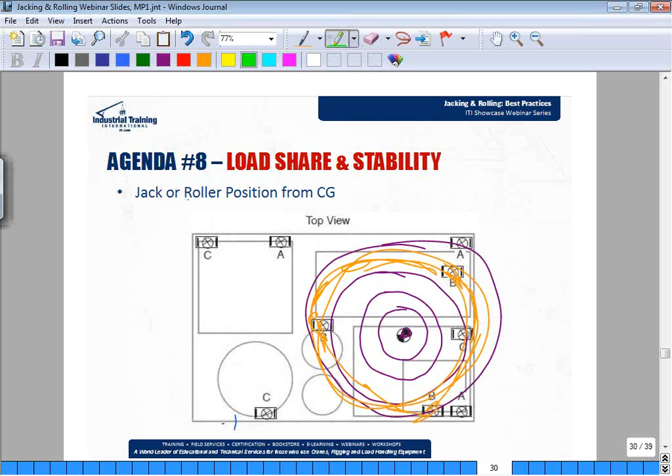and then attempt to ensure that we have equidistant or equal spacing one to the other. That sounds like, well, that's the perfect world. Well, sometimes you start there and say, if that's doable, great. If that's not doable, what's plan B? And let's see, and go from there. So that's the concept and thought, and we wanted to bring that to your attention.

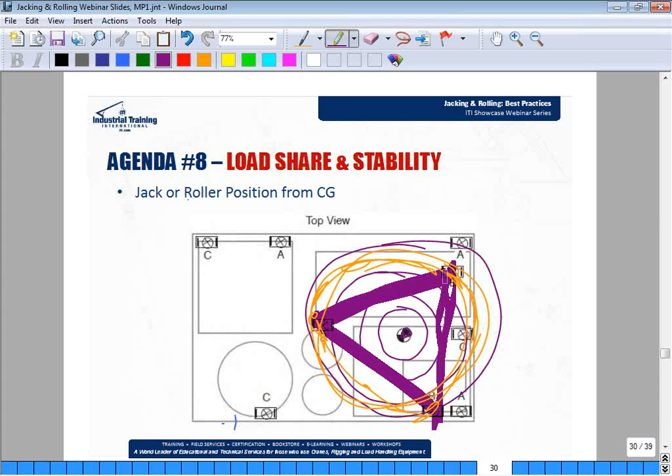So moving into after we use our rollers or pups and swivel heads, we want to park these things, and a useful parking method in this case is to orient our pups, our rollers, towards the center of gravity, and 2 will do, but 4 is great. This will keep the load from rotating and from sliding along at maybe a slight incline, or even being pushed and inducing some type of movement.

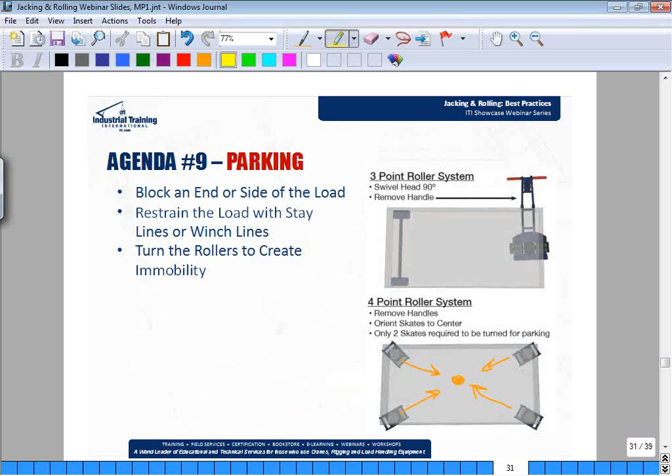Really, we just create immobility here. With our swivel system, we're going to turn the swivel heads in different directions than our pup system here. One of the things you want to remember when we park this load for a brief time is to remove that handle so we don't have any tripping hazards or any equipment rolling over for crushing. Or, if we can't reach or don't want to reach underneath the load, we'll barricade it or tape around it and secure it.

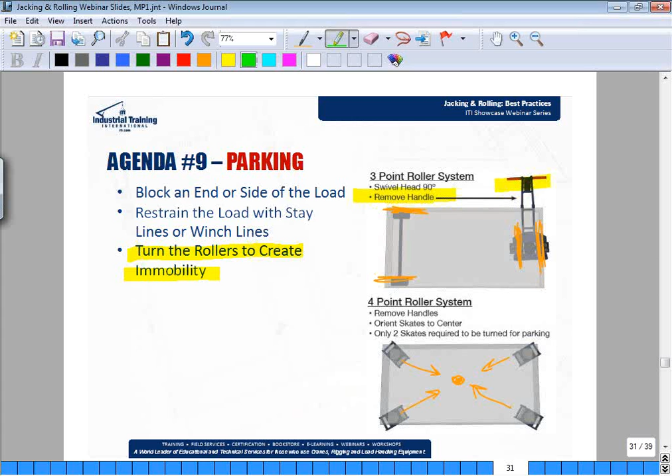And also we can make sure that if it's a large load, we may need to backstay it with a winch from either direction or both directions, or stay it with guy lines, guy wires, etc., or jack and block one end and put it on blocking so that it can't roll anywhere.

There was a question that came in about maintaining parallel lines with your rollers, and you certainly want to do that. Let's just point these all in the same direction here for this load. And yes, you want to maintain that. The skates, there's a tie bar right across here on the back end, and then this is the steering end. So we can negotiate that, and that can turn to the left, to the right, etc.

Notice that Jonathan, to park this load, made the rollers fight each other, so that it's just physically impossible to move that load north, south, east, west, or any direction in the 360 degrees, because the wheels are pointed against each other, and there's resistance to movement in any direction. Let's go ahead.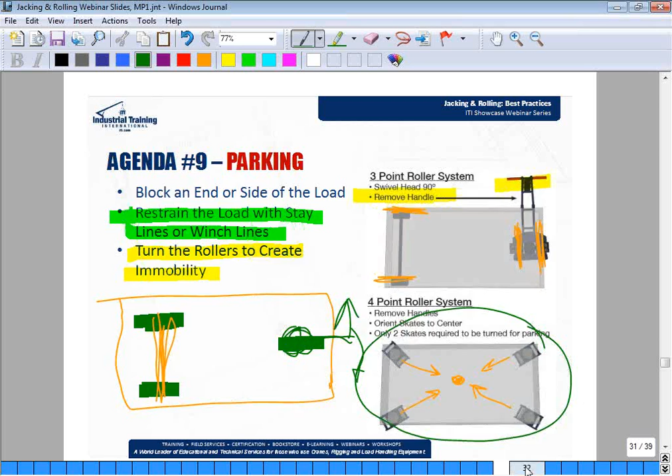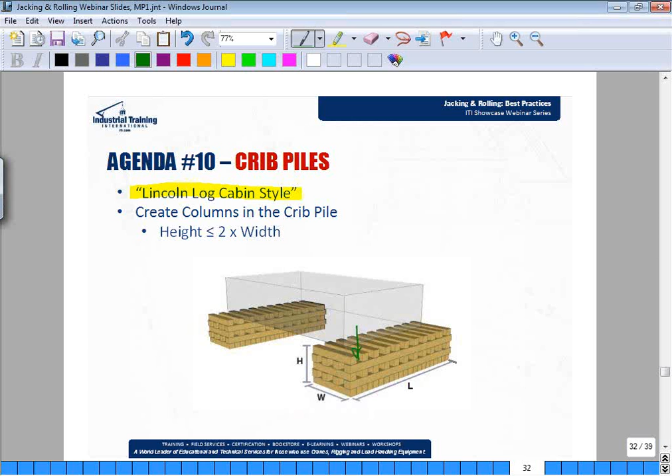We're going to talk briefly about crib piles, and we talked before about the types of wood that we can use for our crib piles. We recommend using a Lincoln log cabin style configuration when we build our crib piles, and the reason for that is they interlock, they transfer load directly to the logs underneath, and ultimately we recommend creating a flat, fully supported surface.

This can be achieved by wood stacks or blocks, steel plates, some type of material that's not going to be compressed or crushed, but can take that compressive force. So it's all about load spreading on the base layer and creating almost like a crane mat, an outrigger mat for mobile cranes, etc. We're trying to spread that pounds per square foot over a broad surface, and if we honeycomb the bottom layer, we're missing half the ground. So if we build a solid block layer, it's much more helpful.

And in this vertical, if we take a look, the columns really are created there at each point. Each step we've got another 4x4. If you look straight up and down, we've got vertical columns all the way along on the broad side and on the narrow side. And there is a lot to think about there.

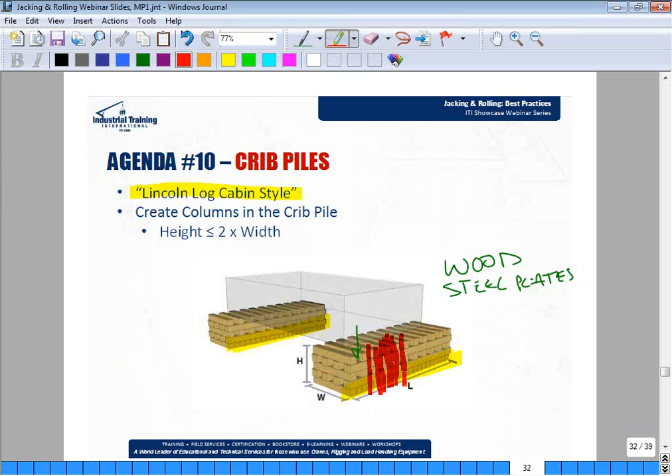It isn't uncommon that as we apply load here, it does send that loading down to the base at something of an angle. So if we have the load landed up here crosswise on the top, we are getting some help. Not only vertically, yes, all our columns are helping us, but we're getting some of that load spread at some angle as it approaches the bottom section.

If you take a look at Shapiro and Dewar and some of their writings, it discusses how, even a little bit with more firm ground, we're getting some outside load to the ground subsurface, depending on its compaction. So the same thing happens in the wood stack: it's not all perfectly vertical, but it heads down towards the bottom in a bit of an angular orientation.

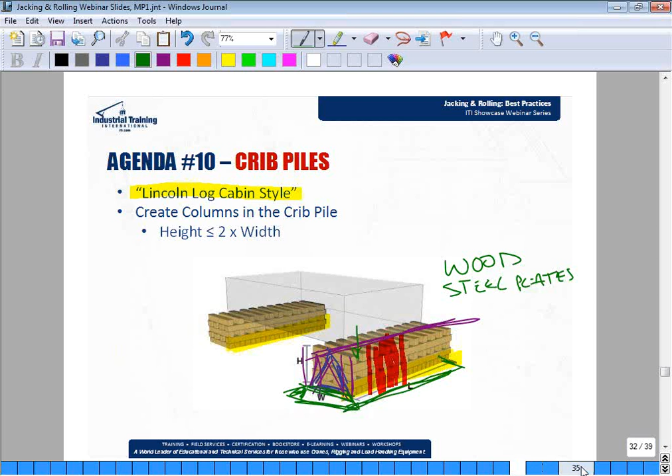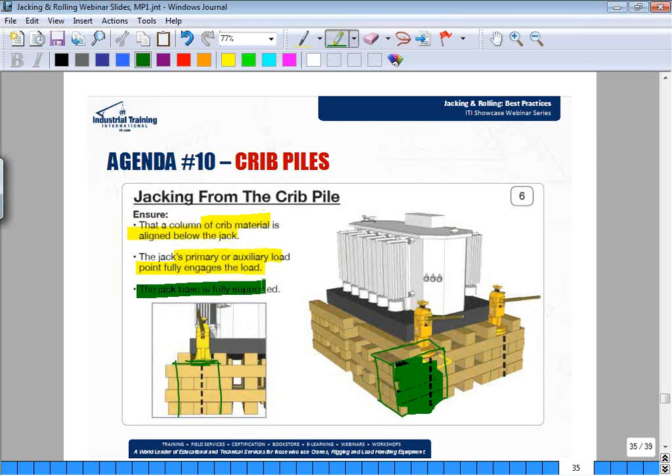So coming back to another portion here, we wanted to provide a little bit of calculation for the loading that we're going to apply to the ground itself. If we end up loading our jack or our block pile onto some ground, a lot of times you'll find a ground-bearing pressure allowance for some sites, and we've just provided a scenario here with 1,500 pounds per square foot as our allowance for this ground. Pretty soft ground, it's pretty fresh construction, and it's pretty light, so we just got to make sure we spread

that load out, right? Yeah, typical values for compaction at construction sites is generally 3,000 PSF. This is kind of what's noted as the standard for compaction results on construction sites. But if we take the share of load and we divide it by the cribbing footprint, so for instance this 2x2 cribbing footprint and the share of load between cribs A and B, we're going to get the pressure imposed on the ground in pounds per square foot.

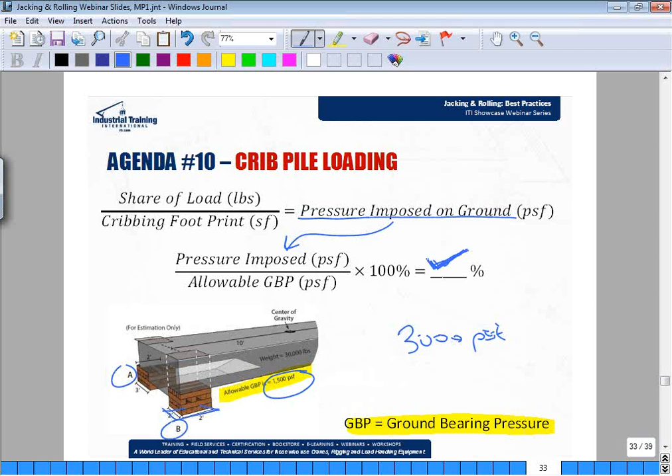We can then take that value there and divide it by our allowable pounds per square foot, our allowable ground-bearing pressure, and get a percentage of how much of that allowable we're actually using and imposing onto the ground. We could take you through a quick example, so hang with us if you like. We'll just do one side here and talk about the imposed ground pressure at column C here.

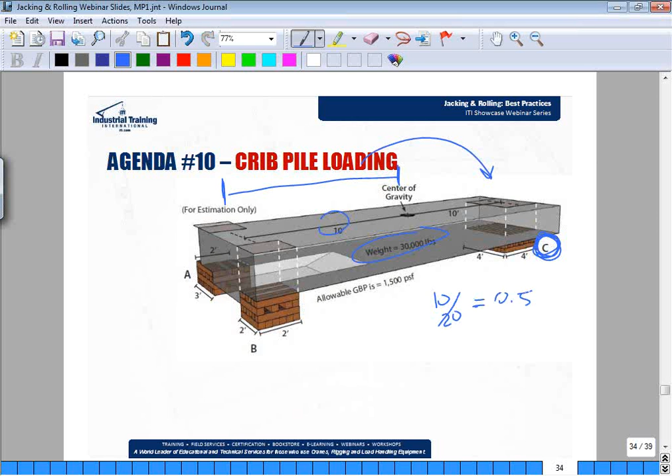And so if we have a total load weight of 30,000 pounds, we know that the load share is a function of the inverse relationship between the center of gravity location here and the distance there. It's going to apply to this load, so we're going to take 10 divided by 20. That's going to give us really half of that load. And so of 30,000, we're going to take 15,000 pounds, and then we're going to divide it by the square footage of our pad there, or our crib pile.

So we're going to take 16 square feet, and it comes out to 938 pounds per square foot. And what this tells us is that if we have an allowable ground-bearing pressure of 1,500 pounds per square foot, we're going to divide by 1,500 PSF, multiply by 100%, and that'll give us 63% of the actual ground-bearing pressure that we're using or imposing on the allowable.

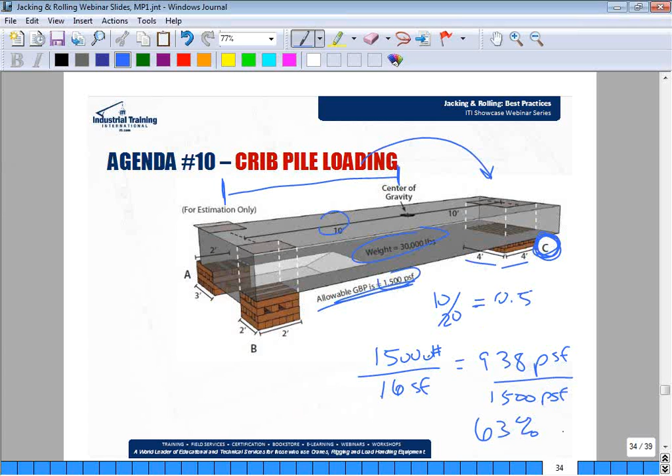And so just a way to ensure that your loading and your crib piles are large enough to sustain the imposed load and not go outside the allowable limits of the ground that you're setting your crib piles on. Kind of switching gears here, we want to look at inclined planes.

I know this is a jacking and rolling webinar, and we're talking about moving loads horizontally. We wanted to provide some information on how to calculate inclined loads or loads to winches or different types of machinery, and just show exactly how much load we're going to be changing from, say, going from a horizontal position to an inclined position.

Here we've got formulas for level surface, going uphill as well as downhill, and then different variables for coefficients of friction to use if we're using different skid systems or different skidding materials. Right now we're using a load on rollers, so we'll look at 0.05 as our coefficient of friction. If we go take a look at an example here, we can see that we have a winch system pulling a load. We have a load weight here of 18,000 pounds.

Our rollers are inclined and going uphill, and so they have a coefficient of friction of 0.05. So taking our uphill equation, we're going to take the coefficient of friction times the load weight, and multiply that by the ratio of the run, that's this run here, and the length, that length there. We're going to add it to the ratio of the height and the length, and then multiply that by the weight, and that will give us the

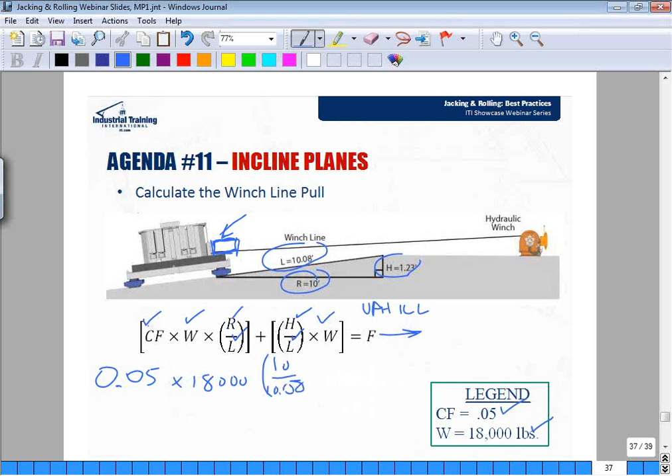Times 18,000 pounds. We're going to multiply by the ratio of 10 over 10.08. Notice we knew the run, we knew the height, and we found the length by a squared plus b squared equals c squared, the Pythagorean theorem. And excuse my handwriting here, but figuring all this out now, we've got the height here of 1.23 over our length, 10.08.

Multiply again by the load weight, that'll give us our force. Our force comes out to be 3,051 pounds. The interesting thing about this is that just because we imposed the incline, that tells us that we've actually increased our loading. So say, for instance, if we got this load up to this position here and we kept pulling, we'd actually see a decrease in our line pull.

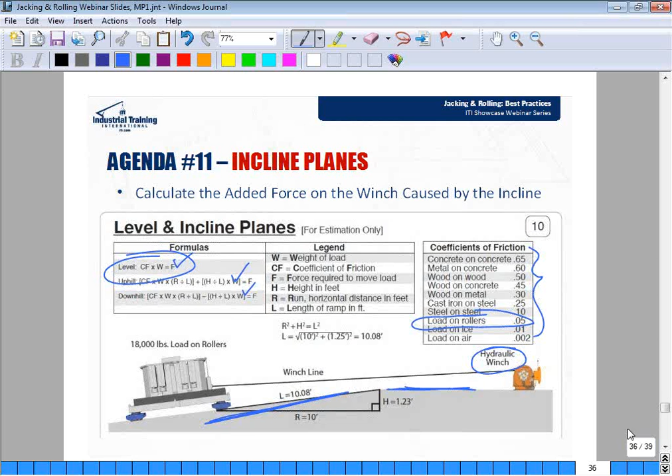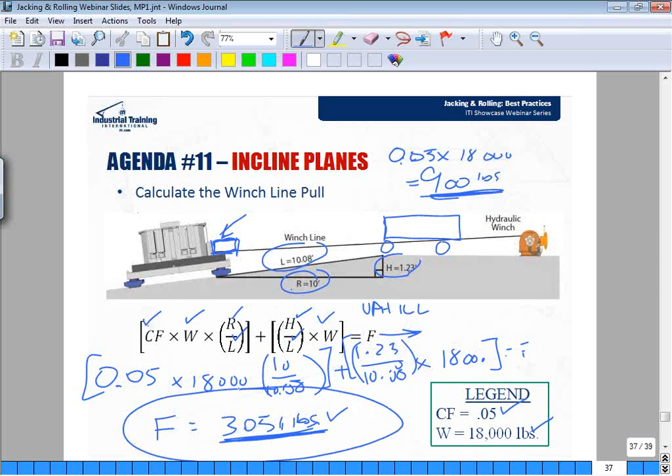And we know that by taking this level equation, the force is going to be equal to the coefficient of friction times the weight. So if we calculate that out real quick, if we take the coefficient of friction times the weight, we get 900 pounds. And so you can actually see that, just because we pulled the load up an incline, we're going to have a much higher force on this winch line than we would if we were just pulling horizontally across a flat surface.

So talking about kind of in conclusion here and thinking about safe practices, safe use, making a plan for all of our horizontal load handling activities. We want to make sure that safety is primary in our minds, as well as efficiency. Making sure that those surfaces are clean and they're level. We're not doing double work in twice the time.

Ensuring that we have capacity, that kind of goes along with our safety aspect, and capacity of both our rollers and jacks, as well as the blocking material and winch lines that we use to stop the load or pull it up an incline. Planning is kind of paramount. It takes into account efficiency, safety, and making sure we have the right capacity for our loads and our jacks and rollers, as well as the teamwork that goes on trying to ensure that a plan comes together.